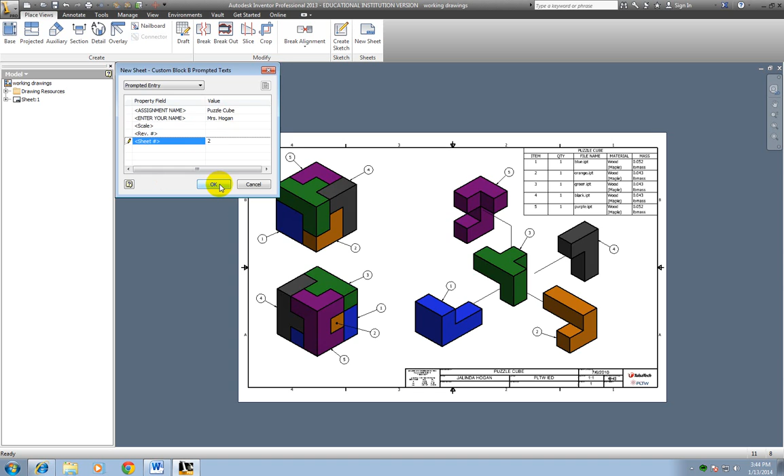My assignment name still is Puzzle Cube. My name. The scale I do not know at this point—I've got to play with it and decide. I don't have any revisions, and my sheet number is 2. I click OK, and I'll go back and do the scale later.

So just like before, left to right, we're going to put the base in first, and we're wanting these to be your dimensioned, multi-view sketches. You want to do a little multi-view sketch of each one. So I'm going to click Base, and I need to go find the pieces.

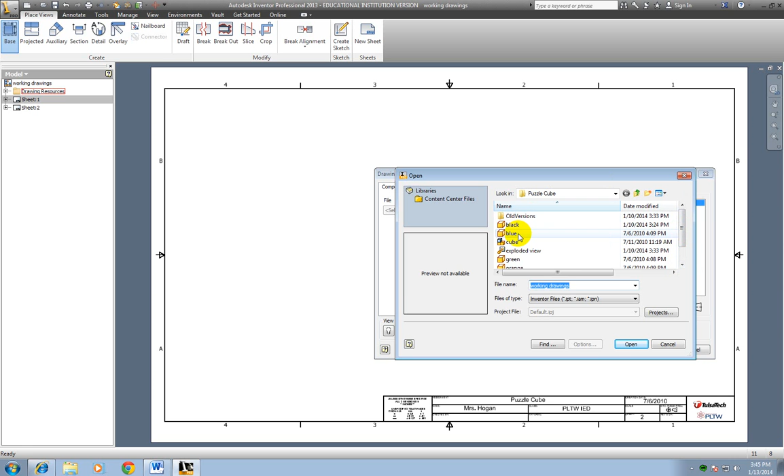Now, there's really no rhyme or reason to what order you're going to put them on there. Some people like to put them in the order that they placed them in. So like on your item numbers, you have item number 1, 2, 3, 4, and 5—you can put them in that order. Here, they're alphabetical, so I could put them in that way. I think it does look nice if you go through and do it by item number—say item number 1 is blue, so I'm going to click on the blue one and open it up.

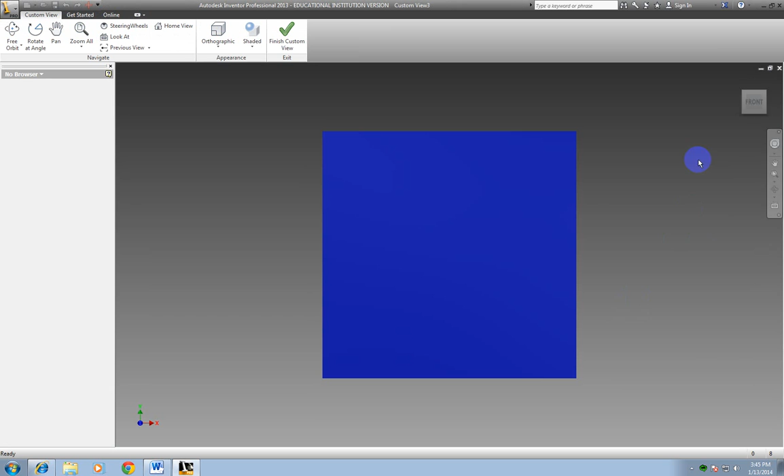Now I've got to decide what I want it to look like for my front view, because you're going to place the front view first when you do a multi-view sketch. I'm going to click this right here because I can't guarantee this was my front view. In fact, I look at it and I know it really wasn't the true front view I'd want to show on a drawing sheet. So I'm going to go ahead and change the view orientation so I can see it a little better. Let's look at this.

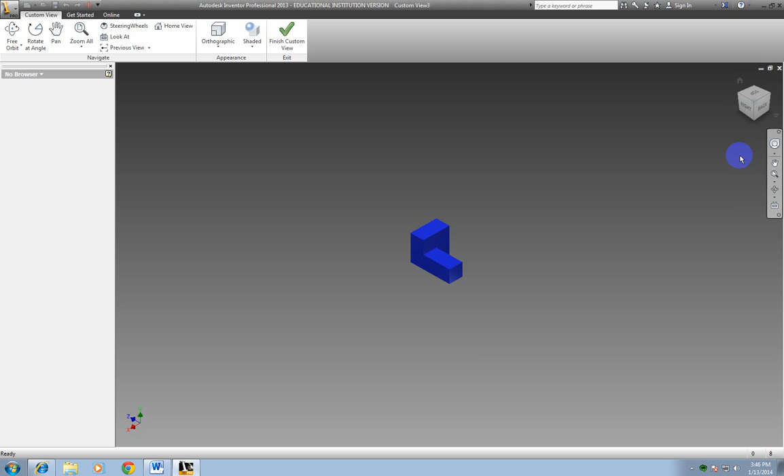One of the rules is that the longest length should be your front view—the one with the most contours or the most dimensions. You don't want to have any hidden lines on your front view if at all possible. To me, this is the longest, and I don't see any hidden lines that would happen. The most detail would also be from this view here. So I'm happy with my front view now.

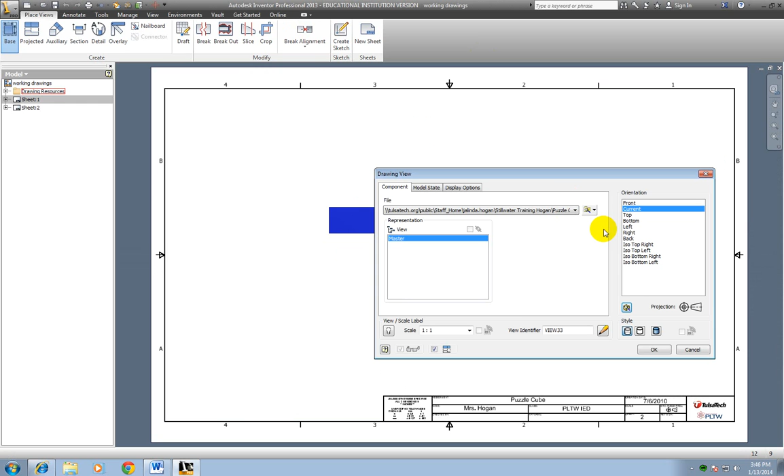So I'm going to click Finish Custom View. We don't want this colored because it is a multi-view sketch. I want my ISO colored, but I can go back and color it, so I'm not going to shade it this time. And I do want hidden lines—it knows that I've picked a front view, which is why this time it already has the hidden line option chosen. We don't want to hide them in this case. Only on the ISO would we want to hide those hidden lines, so make sure that one's clicked.

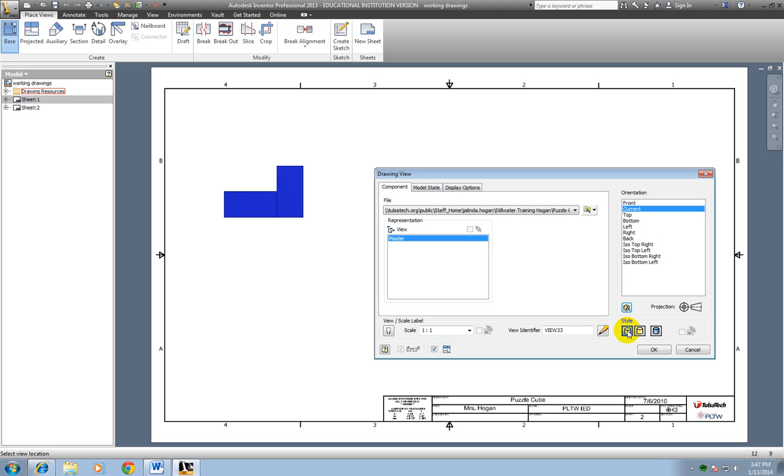And scale, this is a little too big—I'm not going to be able to fit dimensions as well as 5 puzzle cubes with this one. So in this case, you would play around with it. I already know that 3/4 is the best, so I'm just going to type in 0.75 because I know that's the best one. I've already played with this particular one, but in future references, whenever you're doing this, you're going to play with it and decide what you think is the best scale for your drawing sheets.

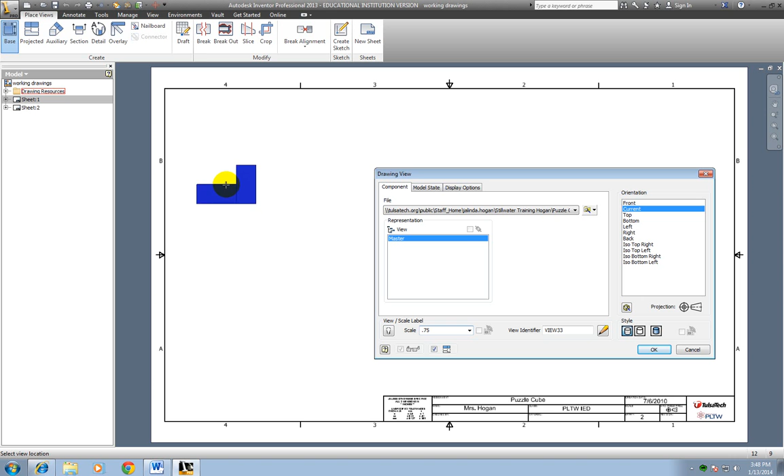So I placed the front one first. I'm going to left click, move up, left click, move to the right, left click, and move down, left click, right click, and I'm going to create that.

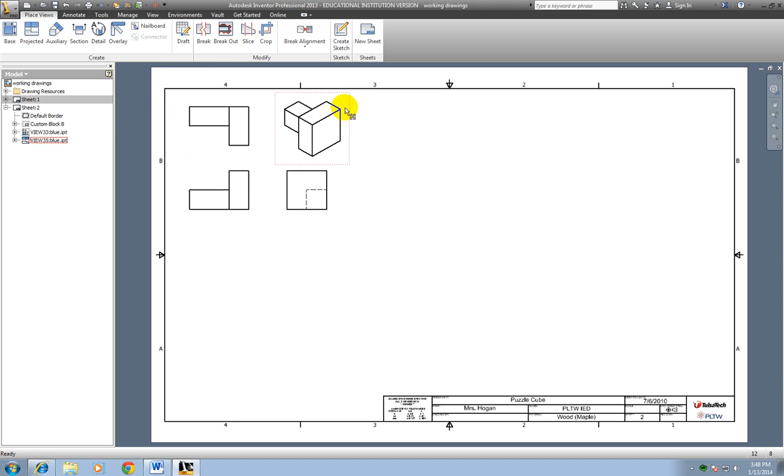Now I want this one to be colored. So I'm going to right click, edit my view, color it, and click OK.

All right, so now if I want to move things around, notice I wait until I get those little arrows that look like this. Notice how the front and right always stay together, and the front and top always stay together, because that's important. By moving the front one, you're moving the others at the same time. We can play with that later when we start putting dimensions on it.

So now it's time to go back in and get the next one. At this point, you can go back and see which one would be 2, 3, 4, whatever. But for me, I'm just going to go through the rest of them. I'm going to open it.

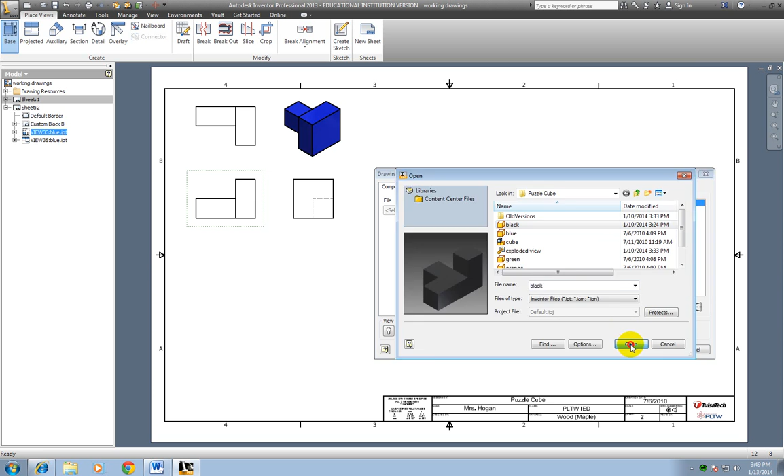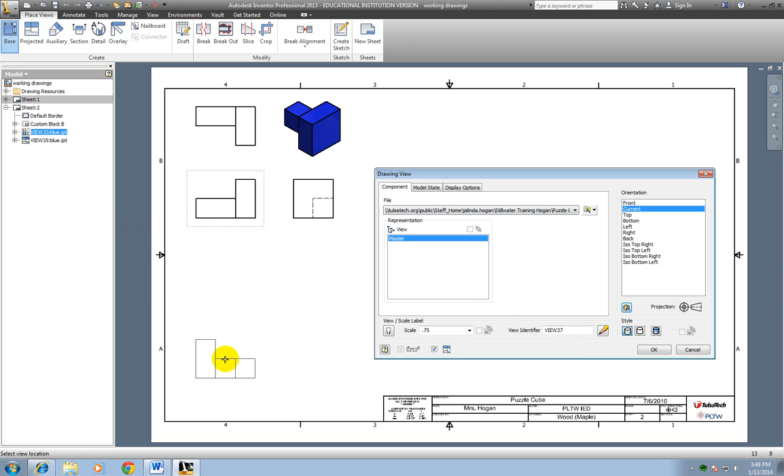I need to go in and find my front view. In this case, I had chosen the best one originally for my front view. Click Finish Custom View. Again, I know I want it on 0.75. I want the hidden lines to show up, and I don't want it colored. So right about here would be my front view, I think. Again, I can always move it later.

I left click, go up, left click, go to the right, left click, come down, left click. I'm going to right click and create.

I want this one to be colored, so I move until I have the little arrows. I right click, edit view, color.

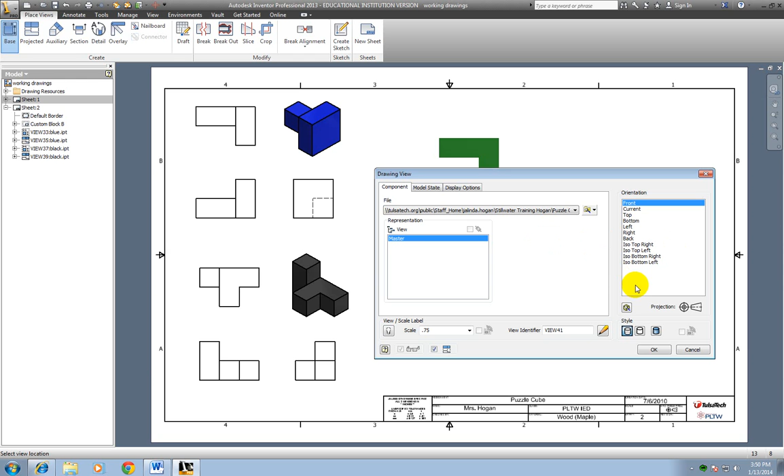All right, I'm going to go look at this view and decide if I think it's the best one. It's not the best one. So again, I want it to be the longest, so this would be the longest. I don't want any hidden lines. I'm going to choose this one.

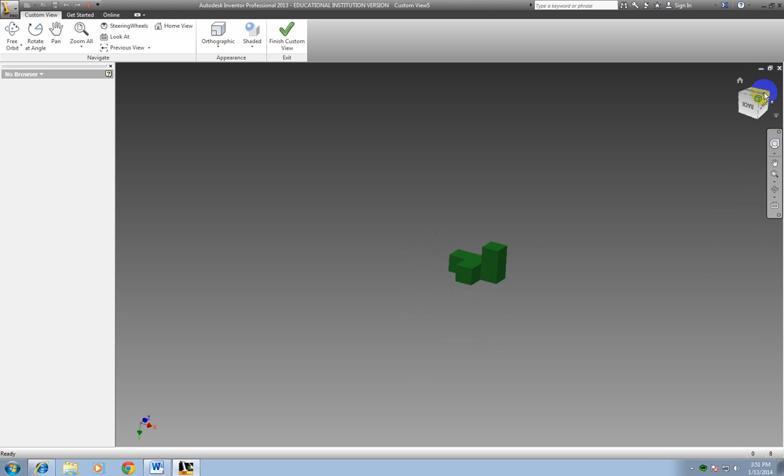Right, I can either do it like this, or I could do it like this. Whichever one you think looks best, you choose. I think this one's going to look the best as my front view. Click Finish Custom View.

Again, 0.75 scale, hidden lines, and I don't want it colored, so I don't have that clicked. Move this out of the way. This will be my front view.

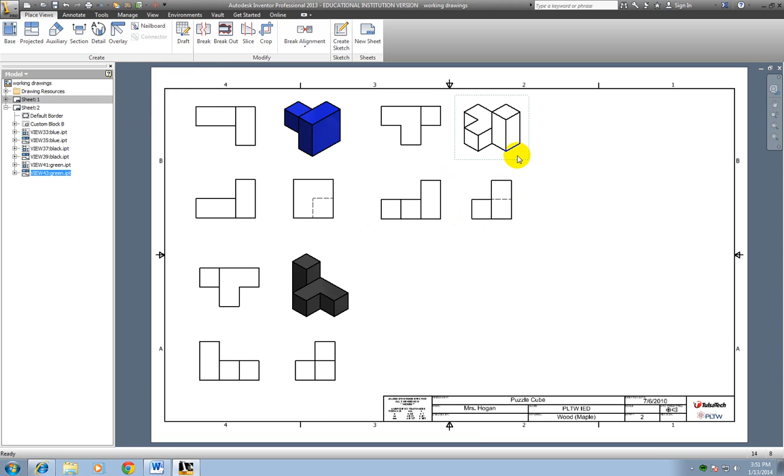Top view, ISO view, right view. And I'm left clicking each time. Now that I'm done, I right click and click Create. Go back in and color it.

Again, base. Go on down to the orange one. Open it up.

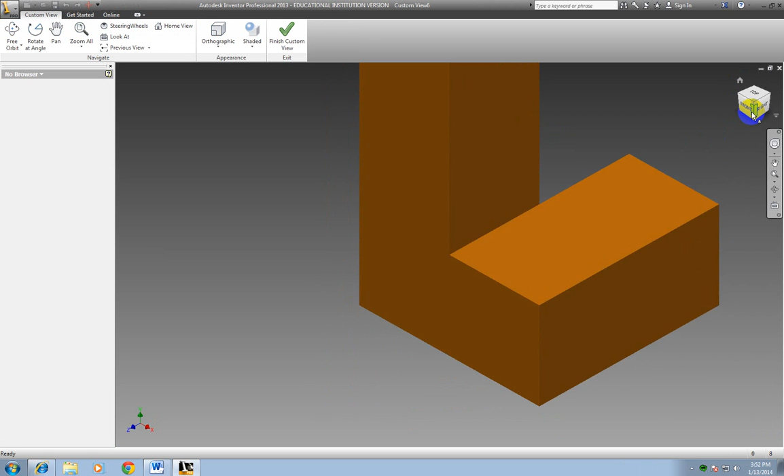0.75. I have hidden lines. I don't have it colored. I want to look and make sure that this is the correct front view. It's not. I want it to not have any hidden lines.

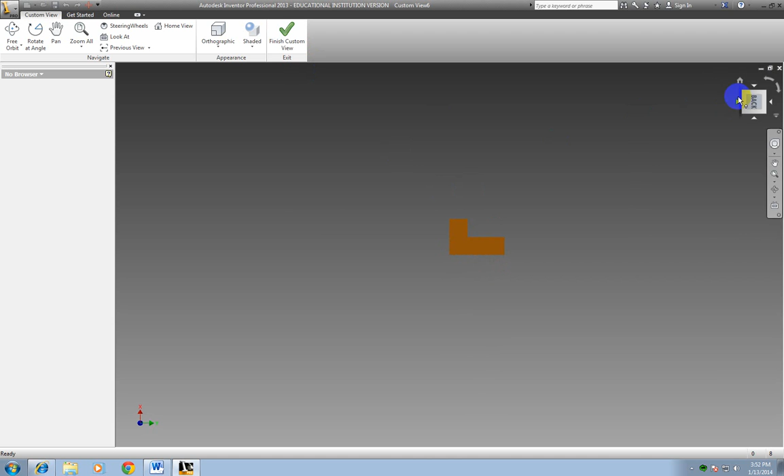Sometimes I look at the ISO to make sure how it's going to look. Okay, so this looks good, but I want to rotate it so that it's the longest as well. So we have the longest, no hidden lines, and most descriptive, most detail, look from it. Finish that custom view.

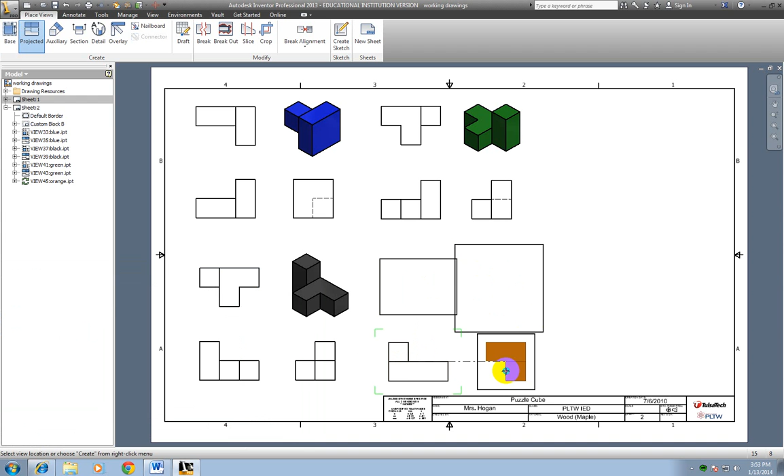Everything I'd already checked looks correct. So drop your first view first, left click, left click, left click, left click, right click, create. Go back and color.

All right, one last piece, and that's my purple piece.

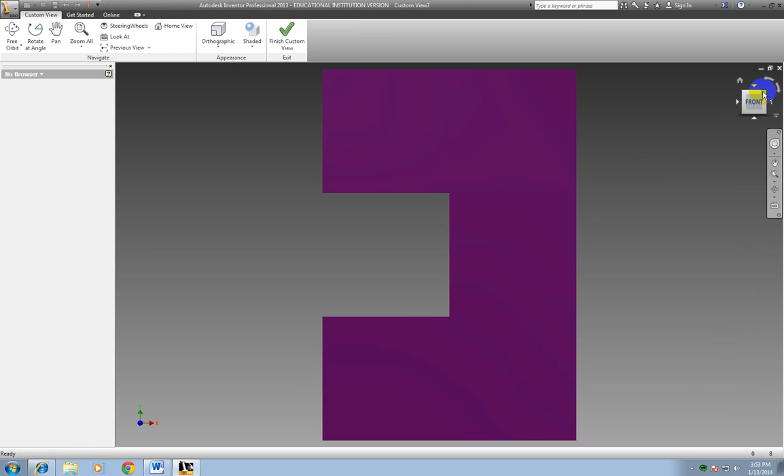Okay, going in to look to see what the best front view is. This one looks an awful lot like one of my pieces. The only difference is that piece right there is on this side for the other color. But...

Again, most detail, no hidden lines, and longest would be this view right here. I finish my custom view.

I have 0.75, hidden lines, and it is shaded. Oh, it's not shaded, I mean. Okay, not shaded. All right, you can either put it up here at the top or at the bottom, it doesn't really matter.

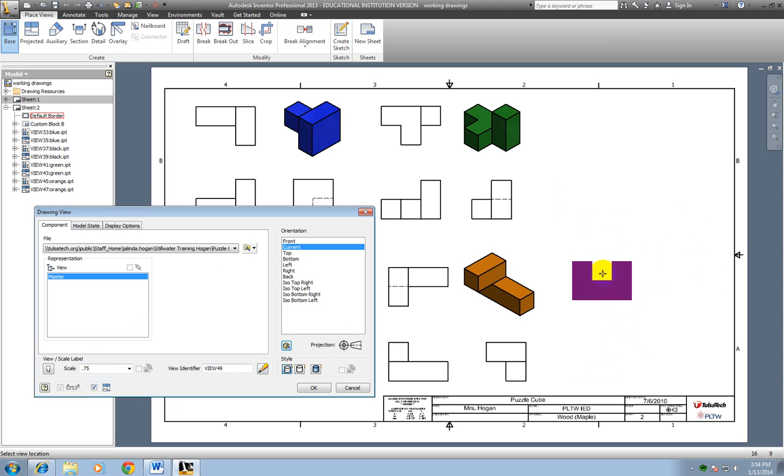All right, so I'm going to left click, go up, left click, left click, left click, right click, create, and then I'm going to color it.

All right, so now it's time to start dimensioning. Hopefully you've already watched the dimensioning guidelines. If you have not, please go back and watch that first, because I'm not going to go over too many of the guidelines as I'm working on this.

I can move things around when I start dimensioning. Let's go back right now, I know what scale this is. I'm going to click plus. We're on sheet 2, it looks like sheet 1 is selected, but it's not, it's actually sheet 2. I could go back to sheet 1 and double click, see sheet 1, and see how sheet 2 is the grayed out area. Double click on sheet 2, I'm now looking at sheet 2. I can click the plus and see whatever's under each one.

All right, custom block B. Click the little plus, double click on field text. I can go in here and say a 0.75 scale. Let me go ahead and click OK. Yours should have auto-filled this in because you went in and changed all of your blocks to wood maple. If not, you're going to use the same trick you had used on sheet 1, where you just type it in as text.

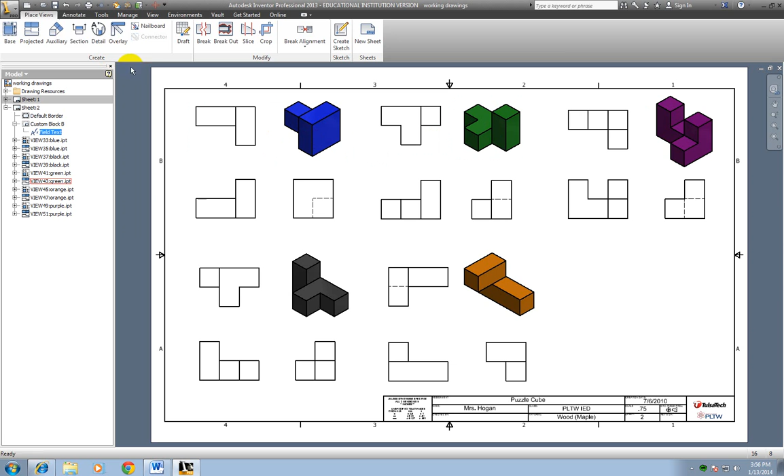All right, so I'm ready to annotate it. Annotate is whenever you put anything on the sheet, word-wise, dimensions, numbers. If I was just dimensioning one dimension, I would click dimension and click on whatever length I'm doing. But I'm not wanting to do that. I want to dimension everything at one time.

So I'm either going to do a baseline, which is what you saw before. Let me go ahead and click baseline and show you how this looks, where I would click each line that would be dimensioned. So if I'm dimensioning the depth for this one, notice I clicked closest to the direction it's going to be going, clicked all 3 lines. All of these lines, I need to know the dimensions in between. I've clicked this one, and this one. Now I'm going to right click and continue. It puts these dimensions in here for me.

And if you notice, as soon as I get a certain distance, they all turn to dotted lines and lock in place. That's where I want it. I would right click. Let me try this again. Once I get it there, I left click, then right click, and create it. So now I have the depth. I couldn't have done depth on this one because of this hidden line here.

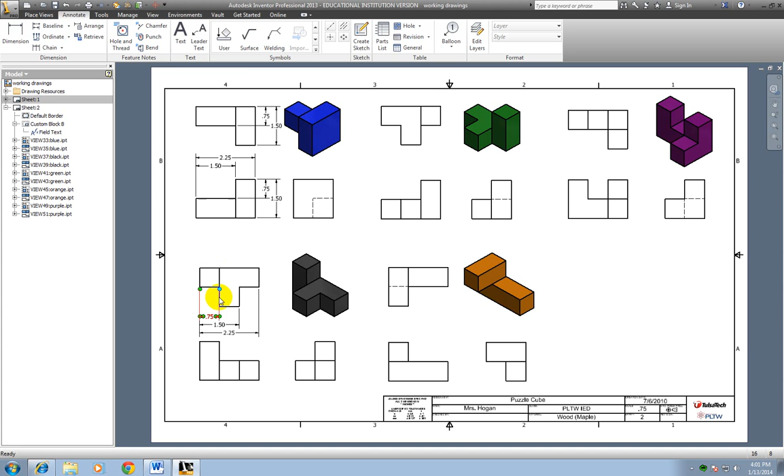So I'm going to zoom in and notice that it's connected. You cannot have an extension line connected to your object lines. So I am going to come in and find my little green dot, and I can bring it down to the very end. Notice now I have the correct distance between my object line and my dimension line.

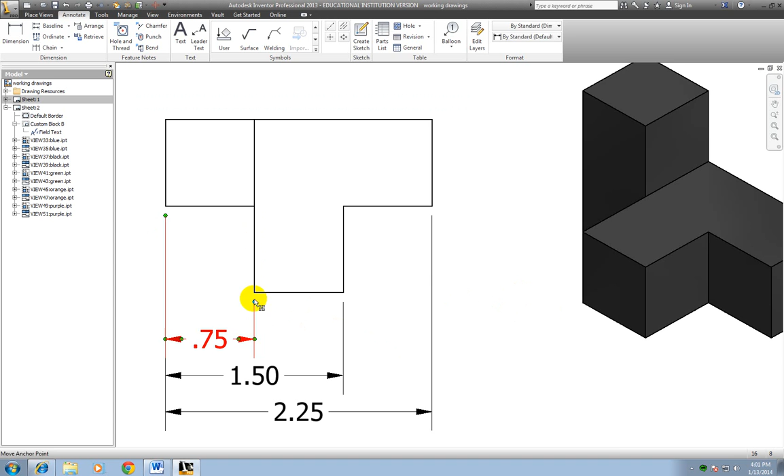So again, it was right here. Well, let me undo that. It looked like this. I came up and found the green line. I brought it down to the corner. I dropped it, and it gave me the correct distance. All right, so that's why if you happen to pick the wrong line, you can always move those green lines around.

All right, looks to me like I need to move this down because it looked like it was getting into my front one. Or I could even have moved this one up a little bit. Move it around so that way it looks nice.

Okay, now I don't really like these lines crossing if at all possible. So I'm going to go ahead and do my depth on my right side. Do baseline, click each one. Notice I'm picking the one closest to where the dimension or the extension line is going to be. I'll choose each one that would have an extension line from it.

I right click, continue, wait till it locks into place. Okay, left click, right click, create. Seems to me like I need to pull this down a little bit again.

All right, now I need to do a height. So I'm going to go ahead and do my height this time on my front view. Notice I picked the ones right where the extension lines are needing to lead from. Right click, continue until it locks into place. Left click, right click, create. And go ahead and scoot these over a little bit.

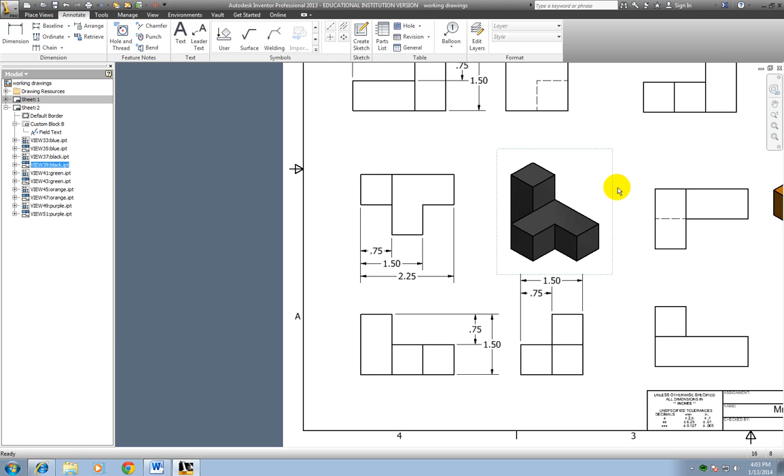I like to keep my stuff lined up, so I would go ahead and move these over a little bit as well. Okay, so I'm going to also bring this one down so that they keep pretty well lined up.

All right, now I'm ready to do the next one. Baseline. This one looks a lot like the one I just did with the black one. All right, so it's the green one. Earlier I had said it was the purple one, like another one, but it's not. So okay, the green one would be the same concept. All right, baseline, pick each one.

This one has the most contour, so I've chosen to use it. Continue, bring it down until it locks into place. Left click, right click, create. All right, let's kind of bring this up a little bit. Bring this one down slightly, so that way they don't get into each other's space.

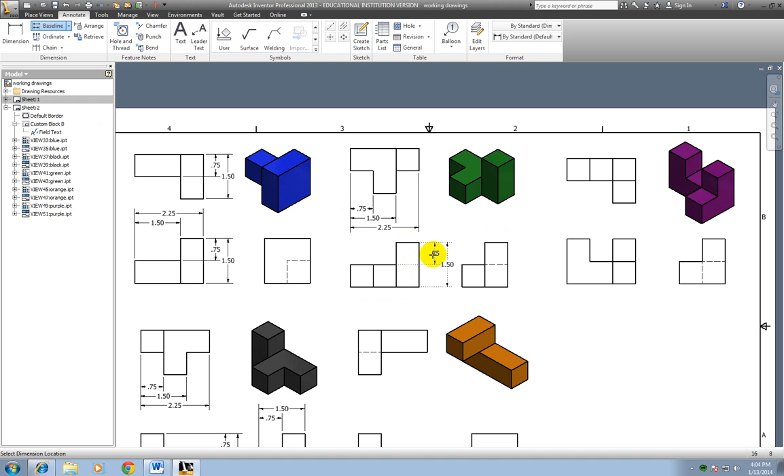Okay, again, the height, just going to do the same thing. Notice I pick the ones closest to where the leader lines will be. Right click, continue, so they lock into place. Left click, right click, create. Notice this line is here, but that's okay because it's just pointing that that object line is at that distance. Right, it's okay that it crosses over the object.

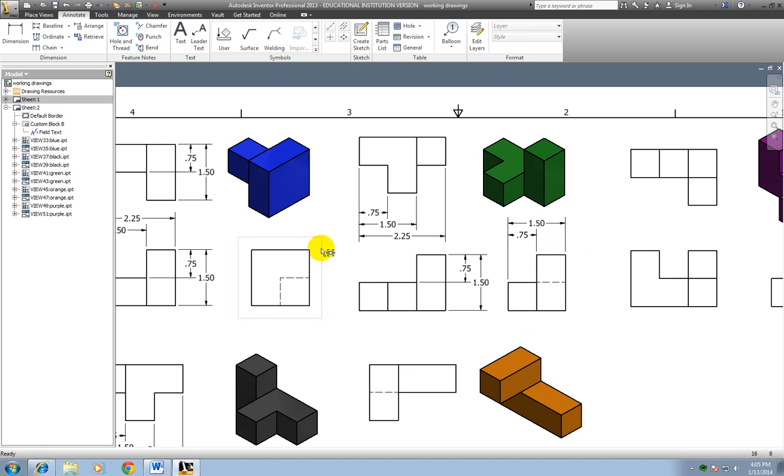Okay, we'll move this over a little bit. I'm going to go ahead and do my depth, or excuse me, on this one. Right click, continue. Left click, right click, create. Okay, let's go ahead and move those down a little bit as well. Keep them all lined up and looking nice.

Again, baseline. Let's go ahead and do this one here. They have about the same contour, but it doesn't have the hidden line. I really don't like to put very many dimensions on something with a view with a hidden line. So I chose each one that are going to have extension lines from them. Right click, continue, locks into place, left click, right click, create. I'm going to go ahead and do the height, baseline, pick each one of these, right click, continue, left click, right click, create. I'm going to go ahead and move this over slightly.

So now I move this one over slightly. Right now I have not done a depth, so I either do it on this one or I'm going to do it on this one. I'd like to go ahead and put it on here.

Baseline. Now I need to do my depth. Right click, continue. Left click, right click, create. So again, I have my width or length, I have my height, and I have a depth. I have one more to dimension now.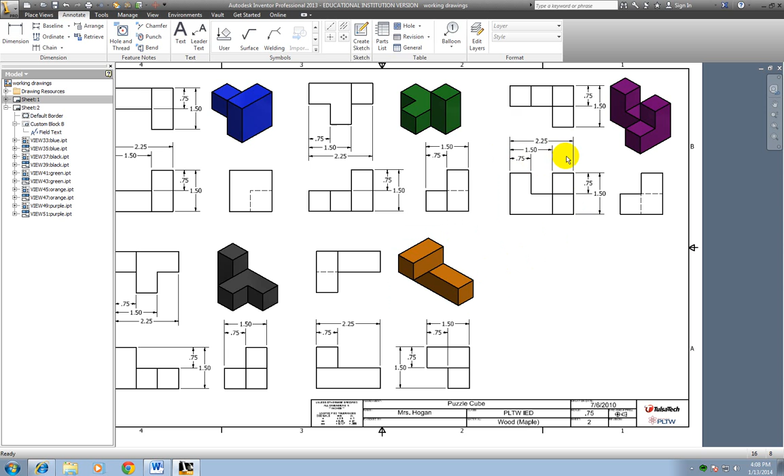All right, so once you're satisfied with it, notice that I want to go back and say I have a width or length for each one of them. I didn't duplicate it, I only did it once. I have a depth for each one of them. Here's my depth, here's my depth, my depth, my depth, my depth.

I need a height for each one of them. I stuck it here, here, here, here, and here. All right, so I've got my length, my height, and my depth for all of them. I've got my title block already.

Okay, and this will give you the same date that you did on the first one. So if you're doing this on a different day, you need to double click, click on creation date, click on the iProperties, project, go over here and click today's date. Click OK.

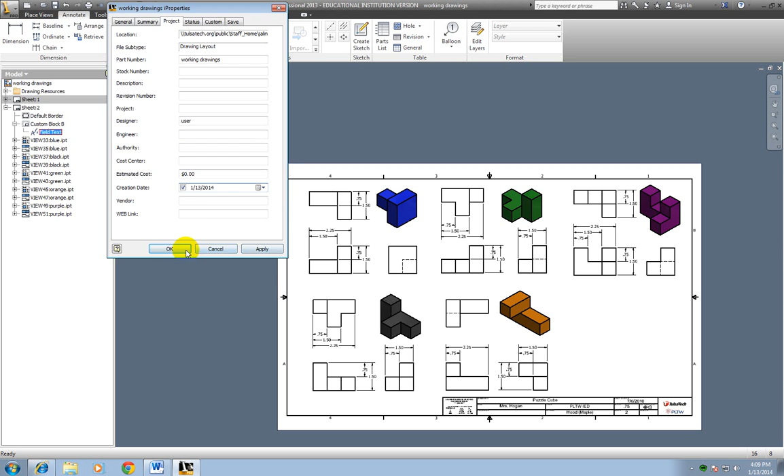I'm going to go ahead and click OK because now I've got everything the way it needs to look. It's time to print it. You print it the same way that you printed the first one. If you haven't printed the first one, you're going to go ahead and print them both at the same time. If you have printed the first one, you're just going to print this sheet.

All right. So again, if you wanted to look at sheet 1, you can double click on it and look at it. Sheet 2, okay. Looks like sheet 1 changed dates. If yours did that, don't worry about it. It's okay.

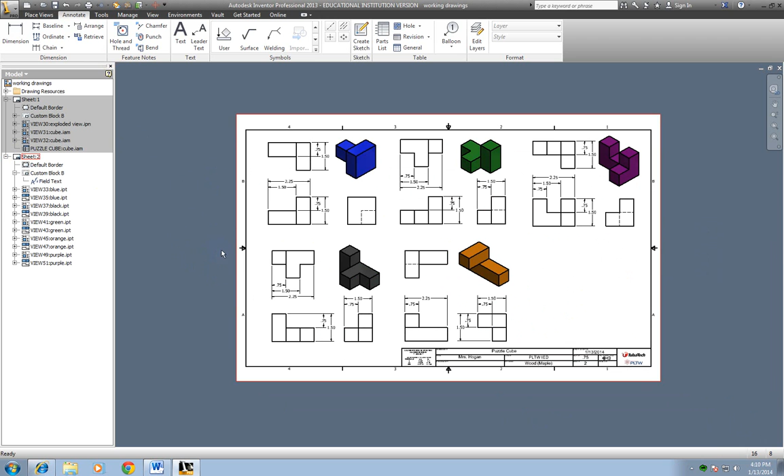We're ready to print it. So I'm going to go up here, click on the large I. I'm going to click print. I'm going to do my current sheet. If I was printing sheet 1 and sheet 2, say you had some modifications to your sheet 1, you would click all sheets, but for me, I just want to print the second one, the one I just did.

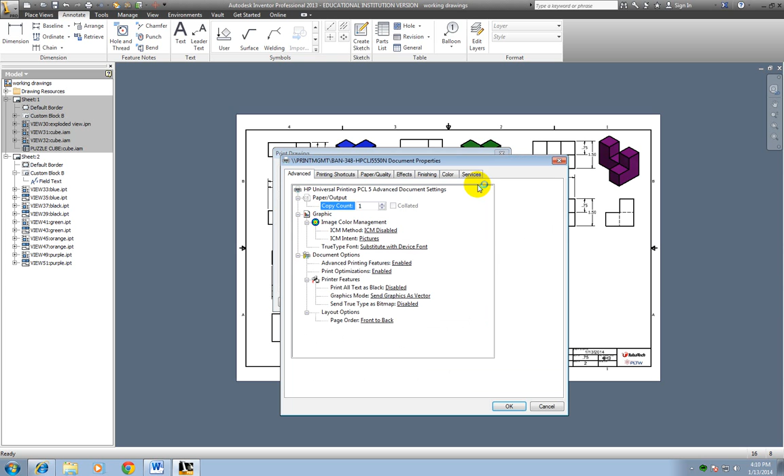I'm going to click properties, printing shortcuts. Again, this is an 11 by 17 paper. I need it from tray 1, and the rest are the same. Click OK, and it's ready to print.

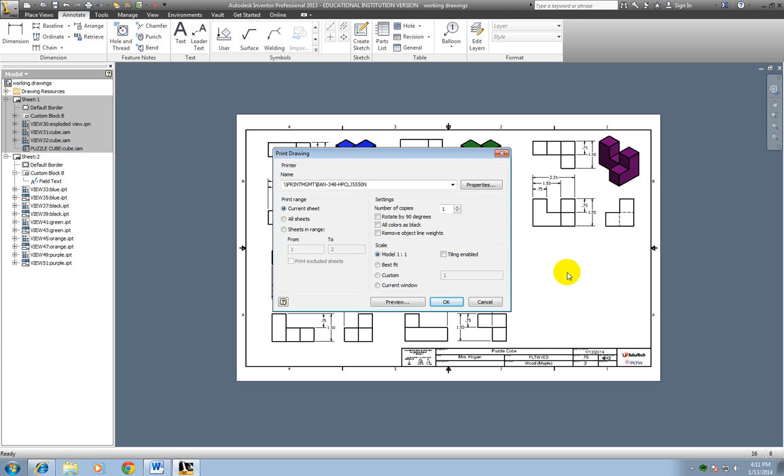So you click OK, but don't click OK until you make sure that tray 1 has been pulled out, that you have 11 by 17 paper in it, and it's ready to print. And again, just put one sheet in for yourself, so that way if somebody else is printing something else, we don't waste a lot of 11 by 17 paper. As you have questions, please ask.